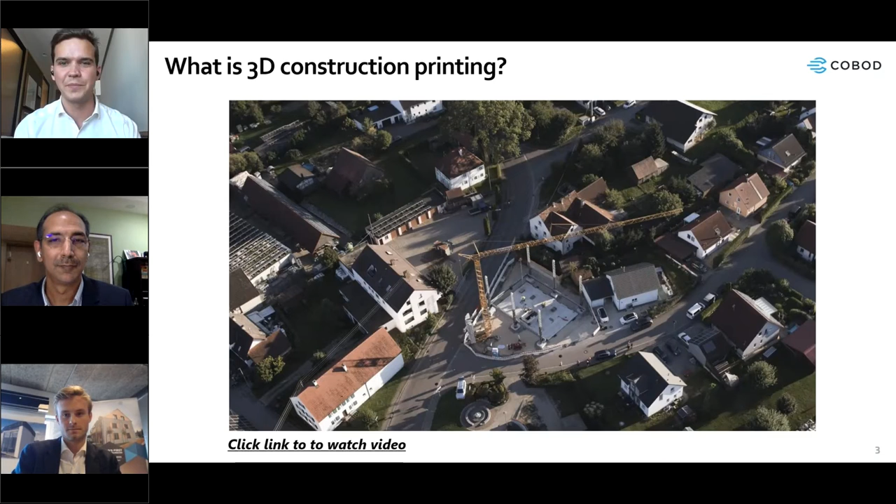Yeah, and today we will be speaking about how 3D construction printing is changing the world of construction. Before we get into it, we want to just quickly show you, because some of you might have seen it before, some might not, but let's have a look at how exactly that looks.

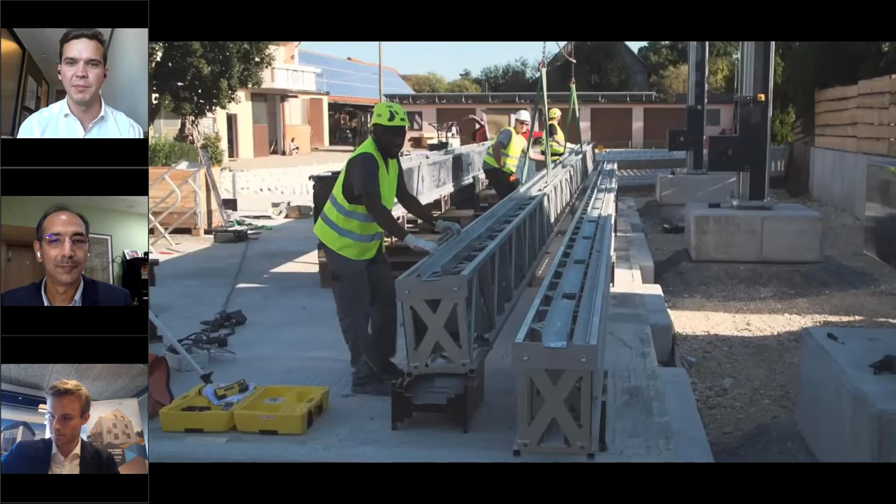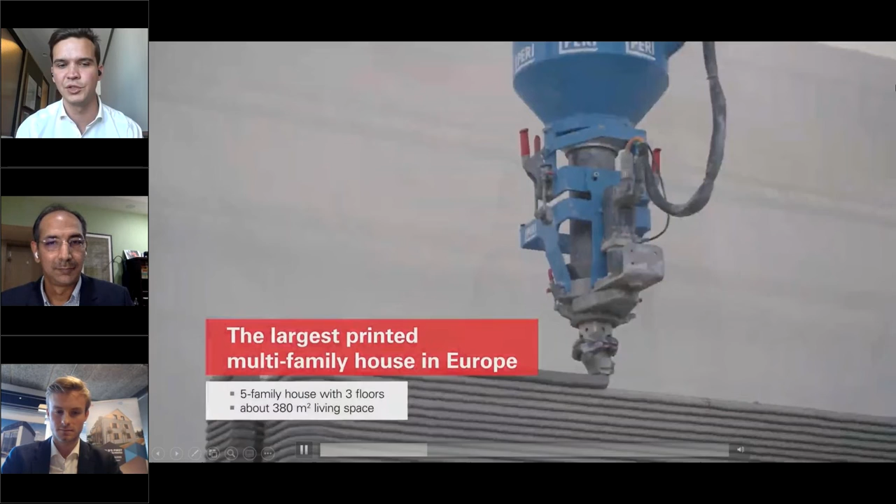So here's a video from our partner and minority investor PERI, setting up a printer here in Germany, where they're building a 3-story home, 3D printed, 380 square meters, in 3 floors. It's a really big 3D print. The video shows how the layers are put on top of each other using concrete, giving you this final structure that real people can actually live in. It's quite fascinating, and it really demonstrates that construction is ready to enter the future.

Let's quickly see what we'll talk about today. First, a quick introduction to COBOD and our 3D construction printing technology. Secondly, we would love to showcase which kind of projects have been done using this technology. And then number three, we want to discuss more theoretically the benefits of using 3D construction printing and what the future of it will be. And then lastly, of course, 15 minutes of Q&A.

Let's quickly jump into COBOD. COBOD was founded, as mentioned, in 2017. We're based out of Copenhagen, Denmark, but we're establishing 3 new offices this year: in the United States to cover North and Latin America, in Dubai to cover the Middle East and Africa, and in Malaysia to cover Asia Pacific. So really expanding across the globe. We are 80 employees right now; 12 months ago we were just 30 employees, and a year before that just 9 employees.

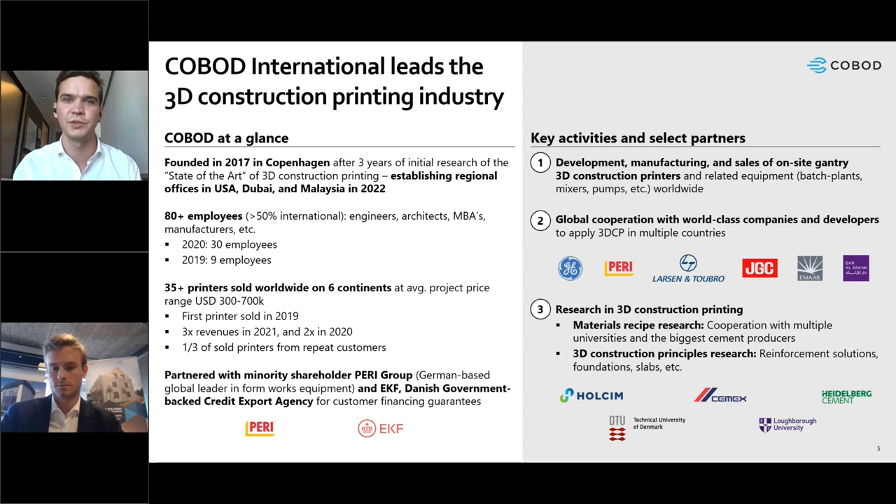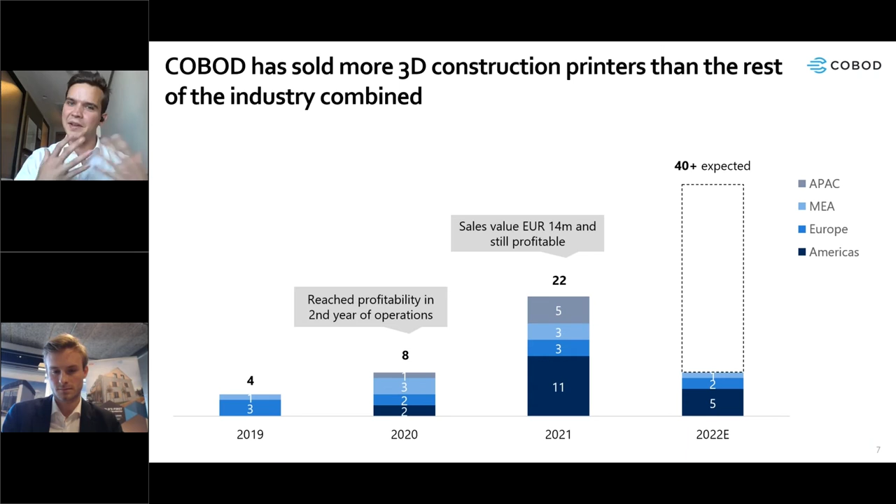If we move on, here you can see our sales. Last year we sold 22 3D construction printers, making us bigger than the rest of the industry combined. This year we expect to sell at least 40 printers. So we're really moving ahead, and this technology is ready to take on the future of construction.

If we go ahead again, Simon. Simon, why don't you take us through how the technology works? I would be delighted to, Philip. Thank you. So let me tell you a bit about how our technology functions.

We have an XYZ gantry 3D printer. It's a modular-based system. From the beginning, when we started speaking with customers, we figured out that depending on the projects customers have, the size of machine needed differs a lot. So we made a modular system from the get-go, our BOD2 construction 3D printer, which consists of 2.5 meter modules in X, Y, and Z. In X length, you can go up to 12 meters. You can go unlimited in the Y length. You can just put on extra Z poles. In height, you can go a bit above 8 meters—actually a bit above 9 as well with this installation if you put it on concrete feet.

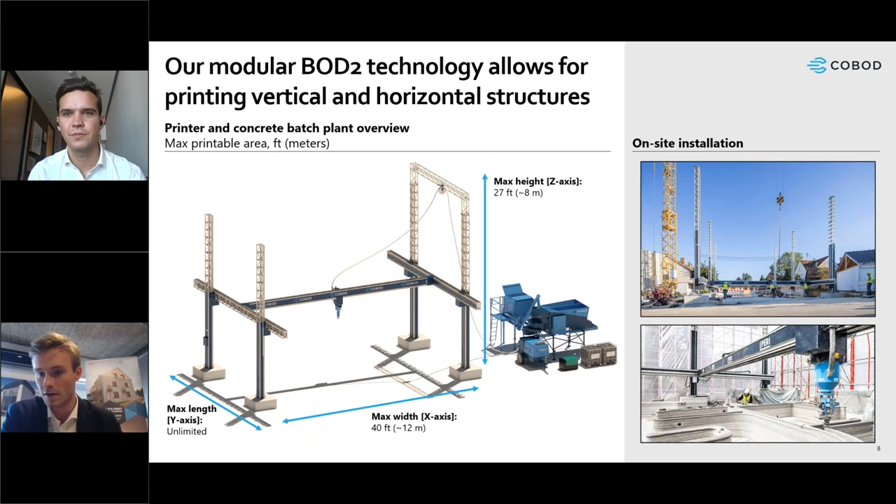On the side of the machine, you can see we have a concrete batch plant, and this allows the machine to use locally sourced material—sand, gravel, and cement. With just a little bit of additives supplied by us, we can then print directly with 99% local material. On the right-hand side, you can see an on-site installation of the technology, where it's printing at the bottom.

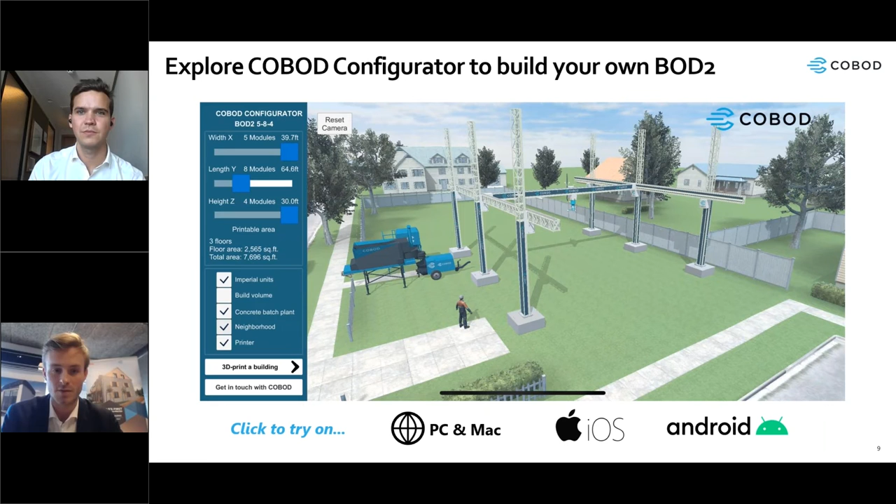I just want to quickly show you, we just developed this for World of Concrete, the biggest concrete fair in the world in Las Vegas here in January—a configurator that explains a lot about our technology and helps everybody understand where we are. So I want to switch quickly here to the configurator. I have to say this is also an Android app and iPhone app, so those of you that want to play with this afterwards, either go to your browser and go to our website, or you can play with it on your phones.

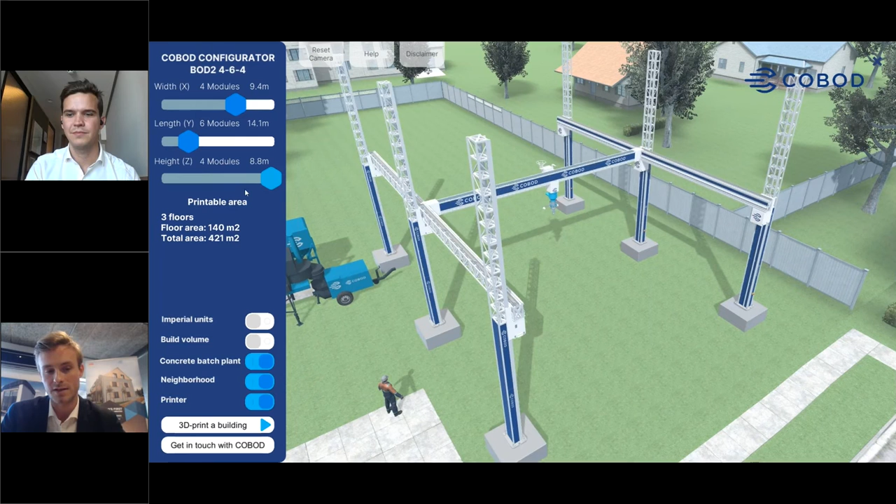The idea here is to give you an idea of how our system works. You can see we have the X, Y, and Z of the printer. You can choose how many modules you want, and you will directly see what sizes you can print. So we can put on the build volume—for example, this version, which is 464 modules, can print you 3 stories with a floor plan of 140 square meters.

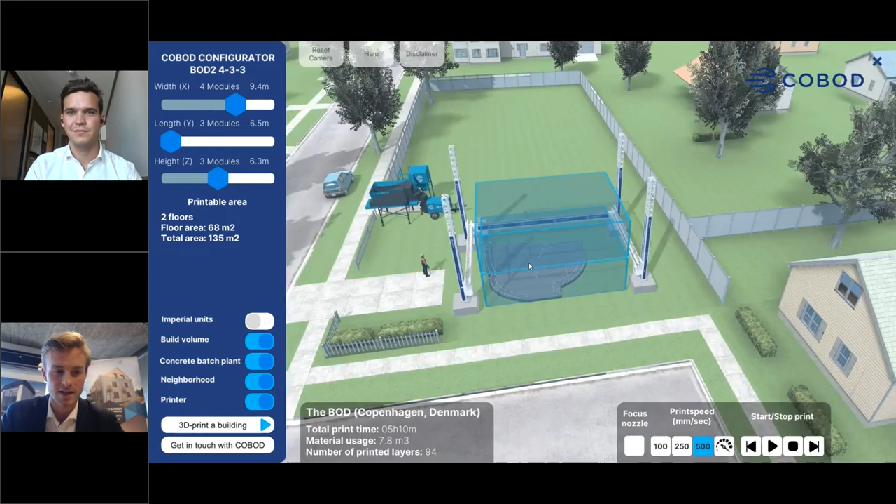We also have—so you can see how the technology functions—I'll show you the first printed house in Europe here. You can actually put in different buildings; we have a library of different ones where you can see it printing. So just speed it up to a little bit quicker here, and you can see how it all functions.

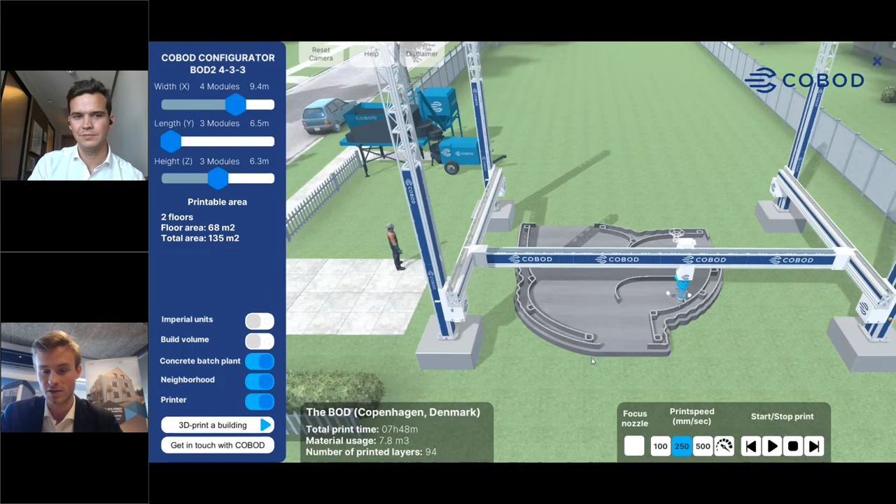At certain print speeds, you can also get an output time. This house will take approximately 8 hours to print and use approximately 8 cubic meters of concrete. So this is quite a fun tool—be sure to look at that later. And while Simon brings up the presentation, I can say it's not as choppy when you actually use it.

It's because the internet connection, when streaming to so many people, makes it a bit laggy. But back to you, Simon. I'm seeing it all fluent on my screen because it's running here locally, right? Yeah, exactly. Good to know.

Good to know. So let's jump into some of the 3D printed structures that our technology has done with different partners around the world. This gives a good picture of what the technology can really do. So to kick that off, I want to show a selection of the projects that have been done with the countless machines we have out there. These are the firsts in the world that made headlines along the 3D printing and construction media.

So we have the first building in Europe, a 2-story building in Europe, a 3-story building in Europe, a 2-story building in India. And with GE, we did the first windmill tower, which is interesting because this isn't a house - it shows this technology can be used in other areas, like what EPCs are doing. Also a residential building in Germany, buildings in Africa, and buildings in Florida. So you can see we have a wide reach of good customers using our technology to head the way for the technology. Let's jump into the first.

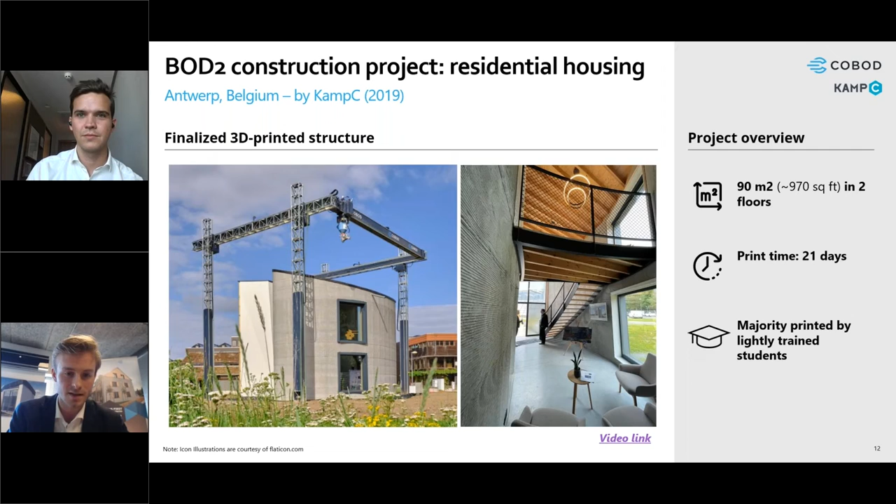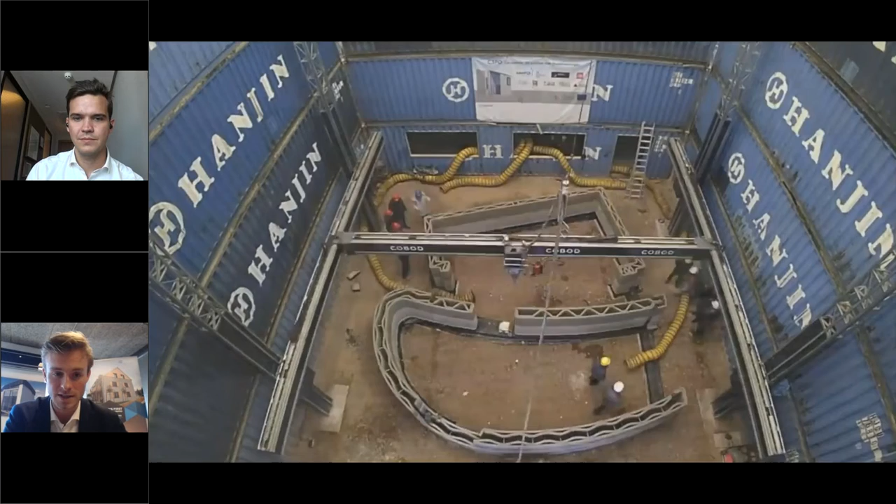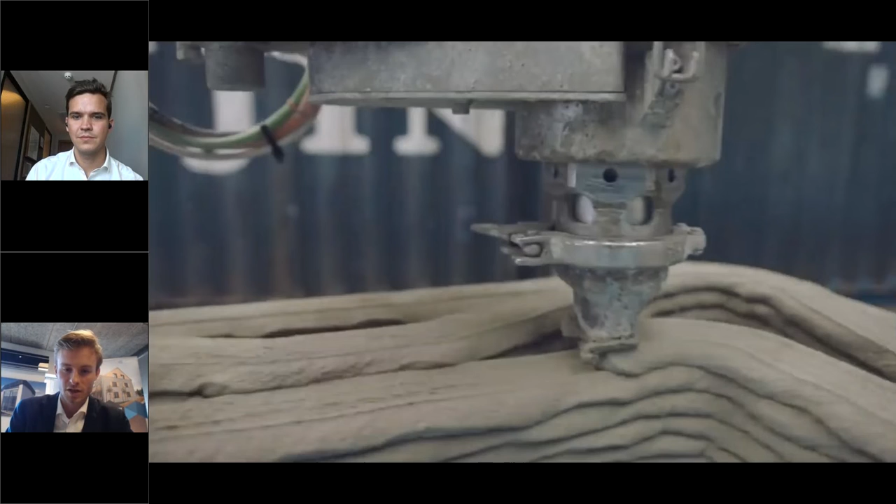It might be lagging a bit, but I think it shows an interesting point: we have the slab, and when they start printing the walls, you'll see they experimented with different kinds of infills inside the walls. Bear in mind this is still a new technology - there's lots of research still to be done, and these guys have been interested in learning how to make these structures load bearing. I'll cut the movie here - you'll have plenty of time to see more printing.

Going to Germany, close by Belgium, we have our investor PERI, a good partner for a long time now. They printed the first 2 printed houses in Germany, and these are fully permitted houses for living in, which is also a milestone in terms of regulations. This one in Beckum is 160 square meters across 2 floors. What's interesting to look at here is both the architecture, which is amazing, but also the print time.

So you can see there's 2 floors - the ground floor took 28 days for them to print, but the top floor took only 8 days. What we're seeing here is the immense learning curve new technology has - but once they master the technology, everything speeds up a lot. Here's a little video of that. You can also see they tried to build in the different amenities inside the house into the printing process.

Then we have the Wallenhausen project, a 3-story building with apartments, 380 square meters. They did this fairly close after the other project I just showed you. From the learning of the first project, you can already see they were down to 7 days per story - and these stories are a lot bigger than the other house. It's also fully permitted, which is of course really important.

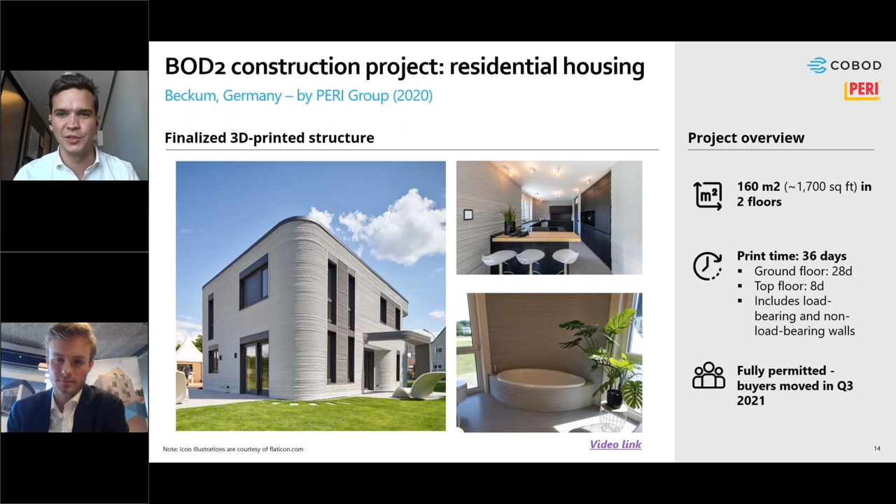May I just add, Simon? If we go back - the first project PERI did was 1,700 square feet, or 160 square meters. The second project they did went up to 4,100 square feet, so they more than doubled the size and added an additional floor. However, they decreased the print time by 15 days. So it really shows, as Simon said, just how much of a learning curve there is and how steep it is. Imagine when PERI does project number 10 or even 100 - how fast they would actually be able to do it. It's quite fascinating.

Yeah, it is fascinating indeed, Philip, and this is also showing what we want to communicate. It is a new technology, so people are learning along the way. If you look at the total in the world, we have less than 100 houses printed at this point in time. So just by learning, we can see that this technology has immense potential to speed up the process of building.

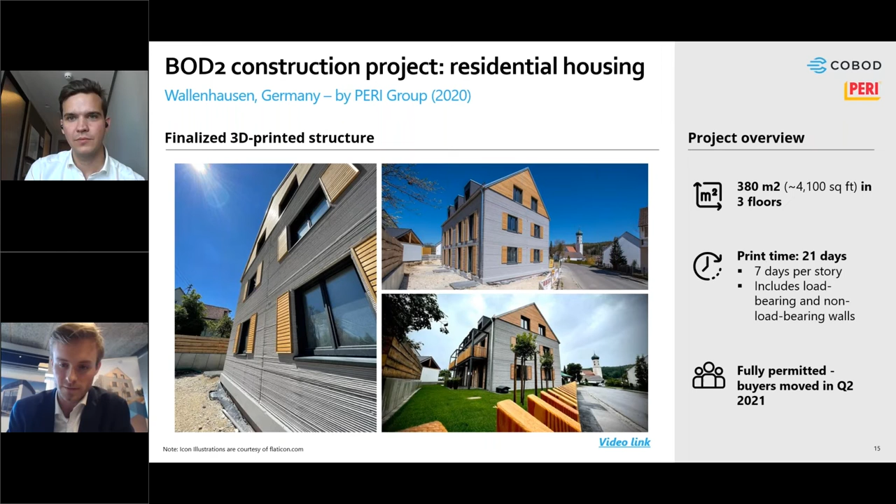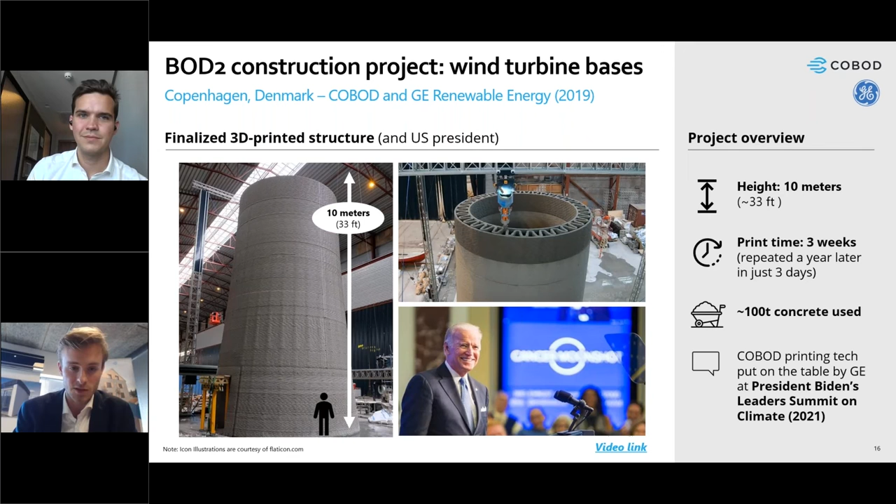So this is such a big focus area for GE that they even mentioned us and our technology and our collaboration at the President's Summit for Climate in 2021, which we're really happy for, of course.

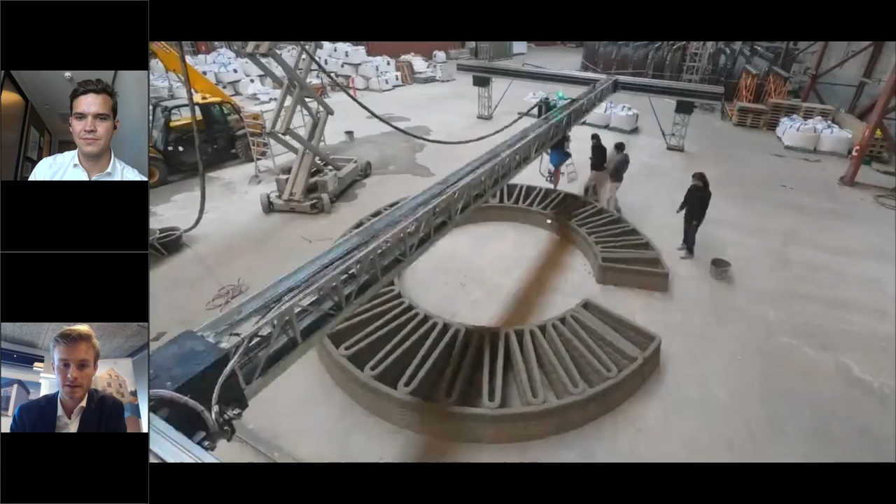And then we can just see a small video here. It's probably lagging, but you can see some time lapse of the printing of the windmill tower. So quite a big project, and also quite a big teardown when we had to get it out of this hall.

So I want to give the word to you, Philip, to tell us a bit more about this Africa project. Thanks. Yeah, I think the last project Simon showed us with GE really shows that it's not just residential or affordable housing. There's also a focus area which is more commercial, or as in this example, a school which was actually 3D printed. This is done by 14 Trees in Malawi, Africa, and it took only 18 hours to print.

And that gives the kids here an indoor classroom and an outdoor classroom. I think we even have a small video here covered by World Economic Forum. So you can see here the kids playing around it. It was actually very cool.

All the kids gathered around the printer as it was being set up and sort of followed through the full print length. So imagine putting a printer on a flatbed truck and then taking it around in local areas and printing schools or other structures that are needed by the local community.

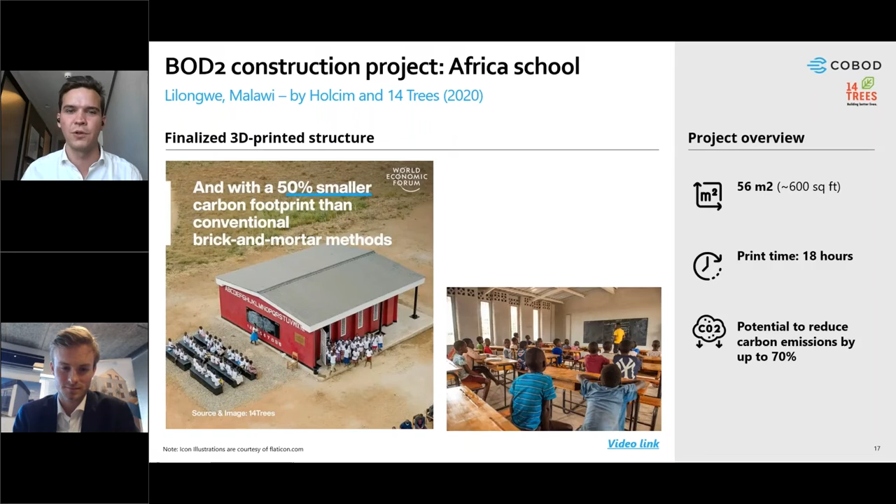So this also shows that the technology is sort of maturing. It's no longer smaller one-off projects, but the projects are actually becoming larger, both in terms of volume, the number of units, but also the units themselves.

So we can move on. Those were an overview of some of the projects that our partners have done. There's a lot more that they have done, we can't cover them all today, but we're happy to discuss further in our Q&A, of course.

Lastly, we want to talk about the benefits and the future of 3D construction printing. So why do we do all these projects? Why have our partners decided to actually invest in this technology? Well, we see four main reasons for that.

Number one is automation - you reduce the labor cost. The second one is speed - you can do structures faster by 3D printing. Number three is sustainability - you only print what's needed, you reduce the waste. And number four is design freedom - it opens up so many new doors that wouldn't have been possible before from a cost perspective.

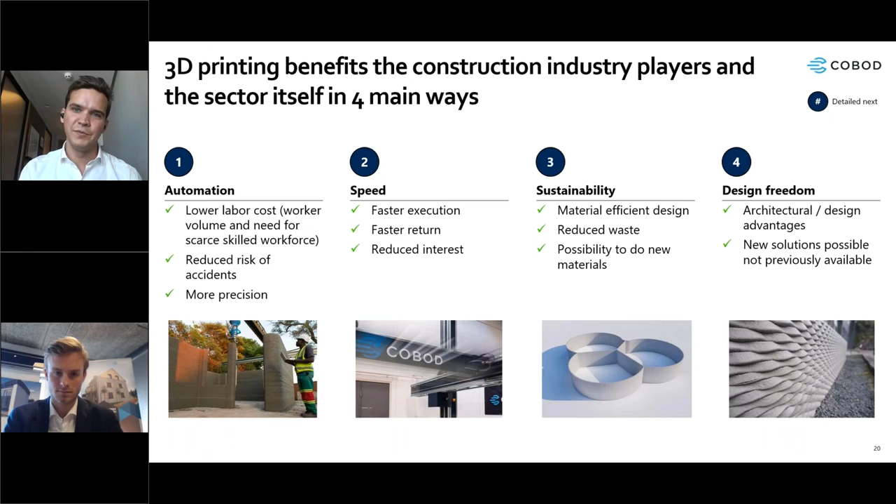So let's jump into each one of these first. If we start with automation, why is automation needed in the construction industry?

McKinsey & Company did a report stating that almost 50% of activities in the construction industry can be automated. It's one of the least digitized and automated industries in the world.

Secondly, there is a major lack of skilled labor all across the globe, meaning that project prices increase and it takes longer, they get postponed. Thirdly, the rising cost of materials—steel and lumber have increased immensely in value all across the globe.

This is why cost and automation is an important factor. And then lastly, there is a global shortage of affordable housing. In the States alone, the estimate is around 4 million homes. Worldwide, the number is really staggering. This is where automation and cost reduction can help.

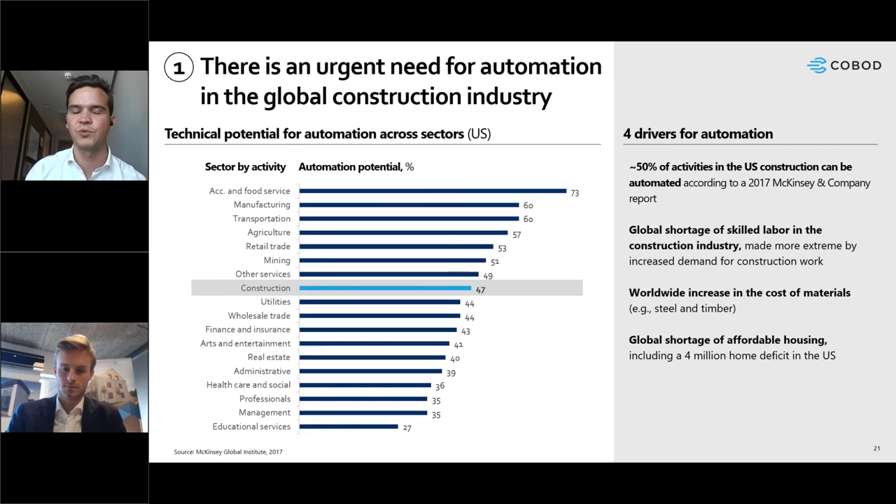So speaking of cost reduction, how does it actually look like from a practical level? Well, the cost addressed by 3D construction printing differs depending on the type of structure. If you're doing residential housing, around 30 to 45% of the cost is being addressed by 3D construction printing. I'll show you an example of just that in 5 seconds.

But if we go down the list, if you do a school, you're addressing more of that cost share. For instance, a school doesn't have a kitchen. So for a school like the one we showed you before, you'd be printing the walls, but you won't have that kitchen, which is also a cost factor.

So the addressable share really increases all the way down to, say, a wind turbine tower base that Simon showed you, where that's 100% concrete if we don't take into account the steel reinforcement. So the overall message is that it really differs from construction project to construction project.

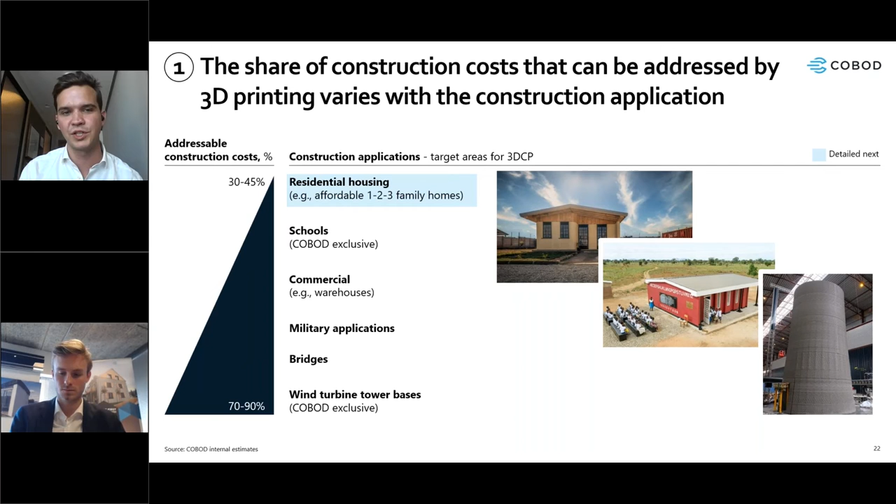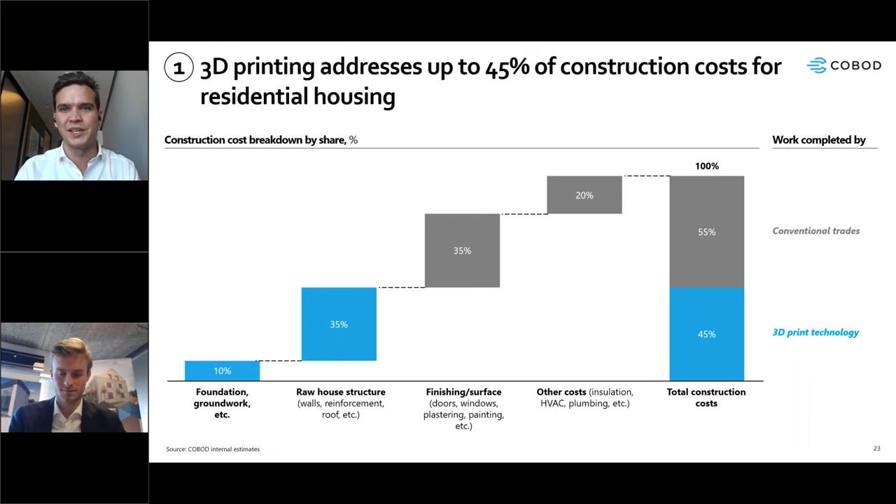And then lastly, other costs that cannot be addressed by 3D construction printing, for instance insulation, heating, ventilation, plumbing—all of that still has to be done with conventional methods. That's why we say up to 45% of the costs can be addressed. That's not to say that you save 45%, but that the total cost addresses 45%.

So how can we actually reduce costs with 3D construction printing of those 45%? If we look at structures that are flat versus curved, you can really see how that comes into play. If we look at a completely flat wall, the cost of constructing it with 3D construction printing versus conventional, we call that 1x—that could be, for instance, 1,000 euros.

However, if we do just one curve, the cost of conventional construction actually doubles. The cost of 3D construction printing remains more or less the same, because the machine doesn't care—for the machine, it's just a file that it spits out. And if you do two curves to that wall, it's around 10 times more expensive with conventional. But with 3D construction printing, the cost doesn't really move, because again, the machine doesn't care.

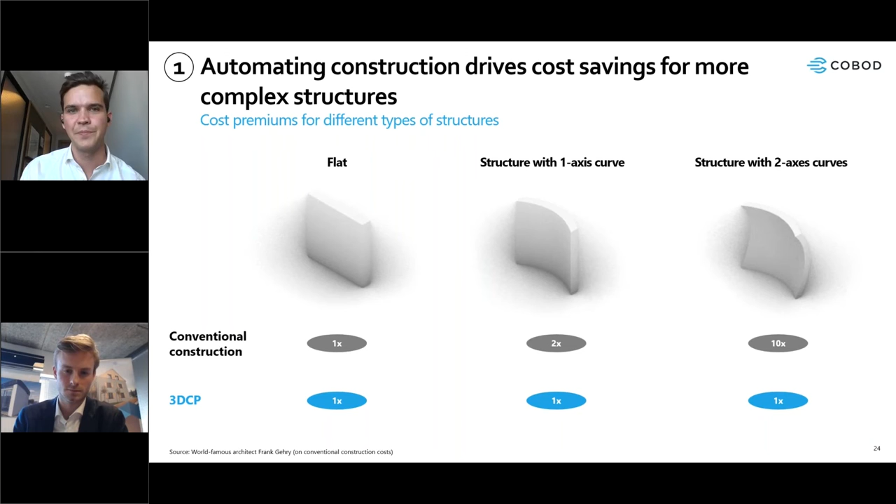So the cost for the walls, potentially also the foundation and the slabs, is very, very low compared to if it had been done with more traditional methods such as timber or brick. In the end, this will be a very big factor in why these companies choose to go for 3D construction printing.

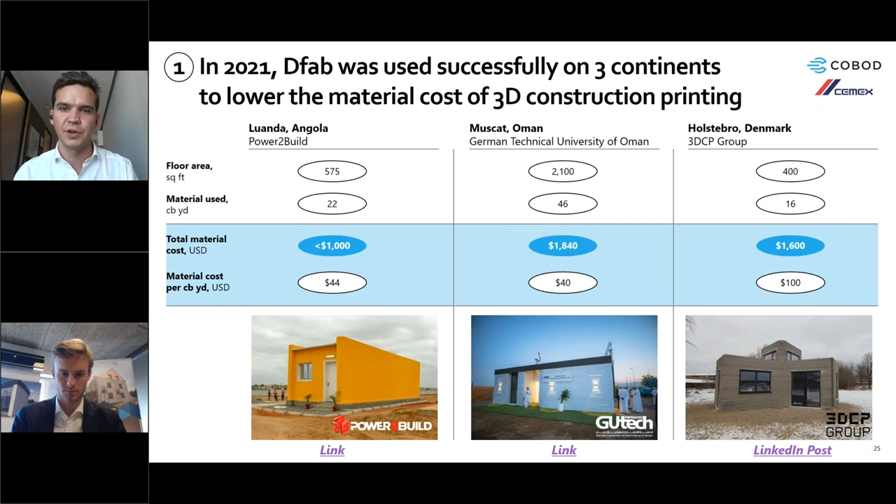I think I'll take over from here. Thank you, Philip. So let's look into the second one, where we look at the speed increase that we can achieve with this technology as well.

We want to show you this example. On the left side, you see the first printed house in Europe that we made in 2017. We made that house in 2 months, with a lot of learnings. You can see the machine, that was our very first installation of one of our technologies. It took us 2 months and used 20 tons of concrete.

After we built our second generation machine, we figured, why not do this again? So in 2019, just 2 years after we made the first house, with all the learnings we made and our new technology on hand, we tested the print again. What we saw was that we did it in 3 days, so 28 hours of printing time in total, spanning over 3 days. So we did some sleeping there as well.

But if you look at these gains, it's quite interesting, right? It's more than 20x in terms of time. This is what we want to show as well, that it has a huge potential in terms of really speeding up the process of making walls faster.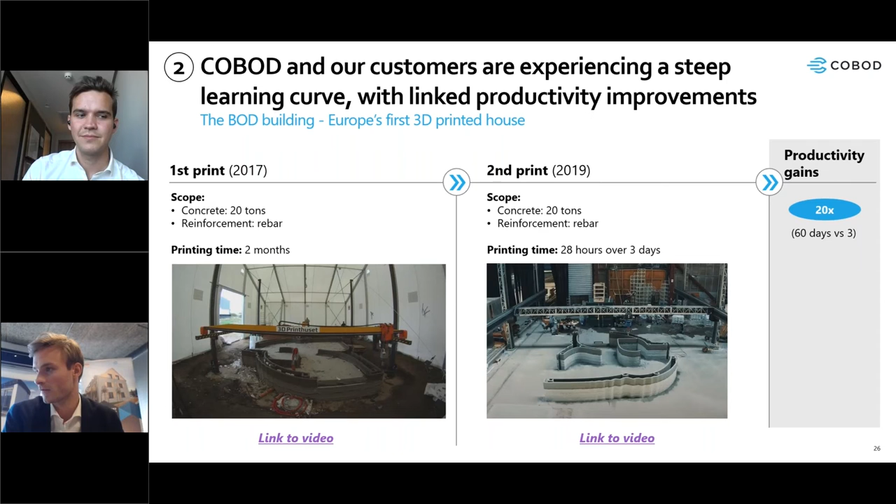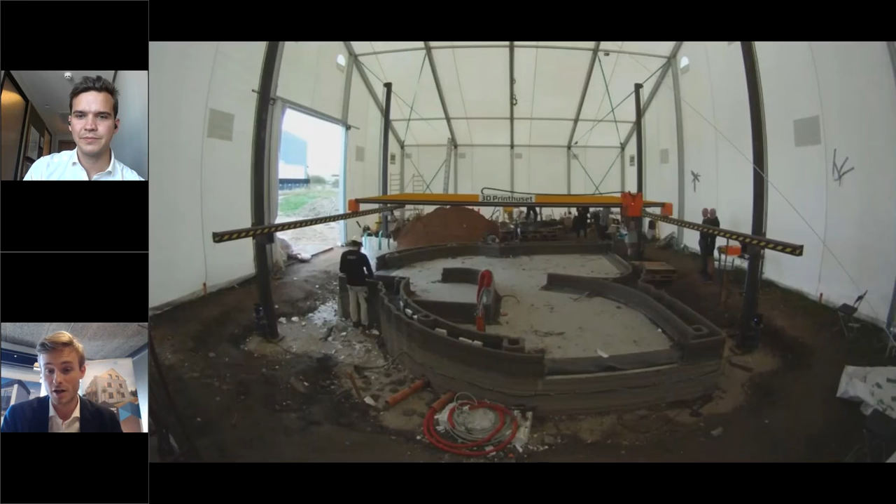I think we actually have some videos, but I tried to mitigate these a bit because of the lagging. You can also see the quality here of our first house was not up to par with what we can do today, at least. We did a lot of research back then, let's put it that way. We learned so much from this, which basically made what we are today. So it was a very, very groundbreaking project at that point in time.

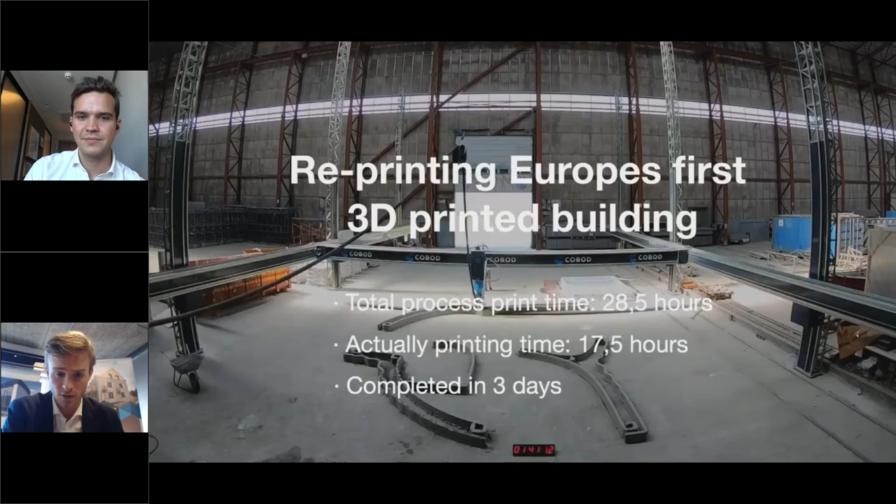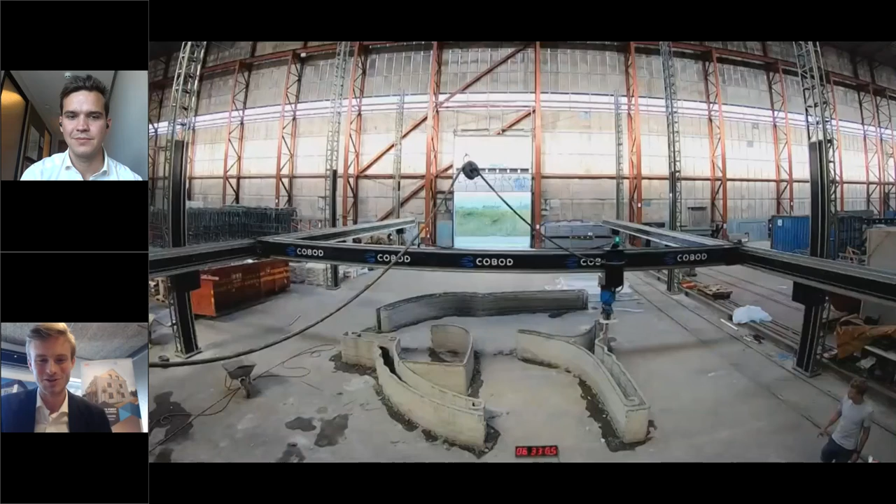I'll just jump over here so you can see the second slideshow. I think that's a bit more interesting. This shows the second print we made with our second generation BOD2 printer. This is the same technology we are selling today. You can see the counter in the front of the video showing the time of the time lapse. More than that, the quality of the walls just looks so much better than what they did just 2 years before that. Because of time, I will just cut this video again. If you want to see all this, we have a good YouTube page as well with all these videos populated.

So if we look at step number 3, which was the sustainability aspect of improvements that 3D construction printing can do, we're mainly looking at 4 different areas. One is that you can actually make less waste. This is quite interesting because basically when you're not casting, with 3D printing technology you can already accommodate for holes for windows, for electrical and plumbing. So all that material is saved because you don't have to extrude it. We're only using the material that we need for the exact build and walls.

Less reinforcement, because in prefab concrete, you typically put way too much reinforcement inside to make it possible to lift it and move it to site. We don't need to do that. We are printing directly on site with our technology, which mitigates the excess reinforcement.

Then material efficient design. Philip told you about the form freedom that we have with our technology, which really taps into this, right? Before, you only did square houses because that was the only cost-efficient thing to do. Now we can actually look at using the forms to mitigate material usage as well. And then new materials, of course, a super interesting point. We used, for example, 23% recycled roof tiles in the BOD building that you saw just before. It could be other filling materials and so on as well. There's even a lot of looking at more green cements, which I think the host of this webinar also knows a lot about.

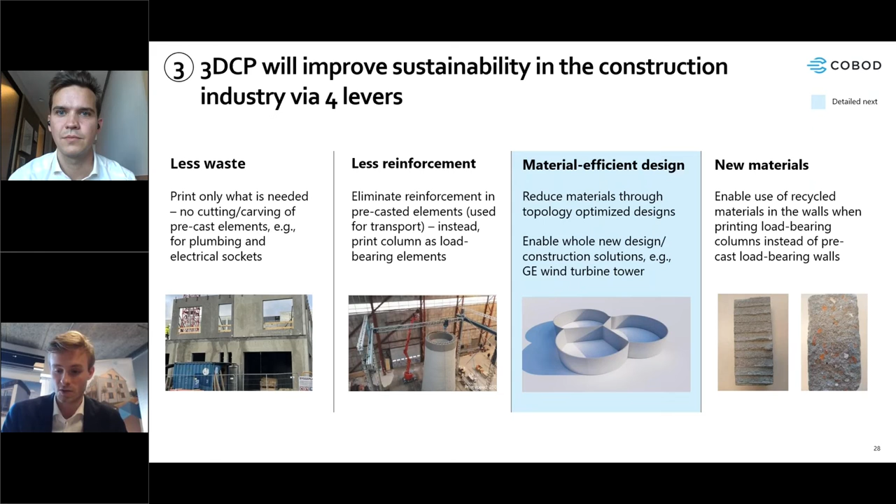So if we look at just the topology optimization, so in reducing material for a certain size of building, we had this case which actually taps into 2 schools in Africa, as we talked about earlier, where the material cost is really one of the driving factors for the cost of the full building. So the idea was to get the same square meterage out of less material. And by doing round forms, you all know that you're actually gaining more area per surface area of walls.

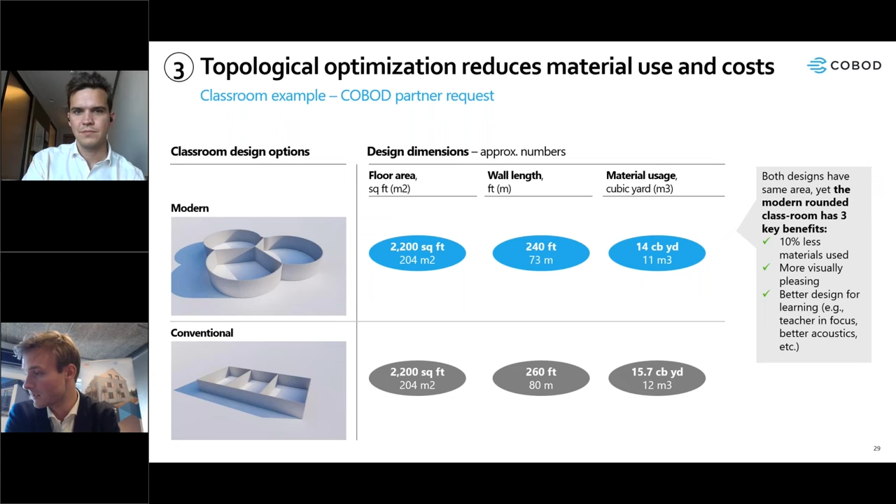So with 204 square meters of floor space in this new design, we're using 11 cubic meters of concrete. In a conventional design with classrooms of the same sizes, but in a square design, you use 12. So that's around 10% of material saved. And in some markets, 10% material saved means much more than 10% in price reduction, right? Super interesting point as well. Then over to you, Phil.

So just to recap what we've said so far, there are 4 benefits to 3D construction printing. We went through automation, we went through speed, and now Simon just took you through the sustainability aspect. Now, the last aspect is one that all the architects listening in today will find interesting, which is that the technology opens up so many doors for doing things in new ways. That's why at COBOD, we say you should not use technology of the future to replicate solutions of the past. We'll give you a few examples, not even related to 3D construction printing. The first one is a bridge.

It was built almost 250 years ago in England, called the Iron Bridge. It's 100 feet in span, around 30 meters. This was the first major bridge made out of cast iron, a very new material for this application back then. However, the way this new technology was used, they basically replicated solutions of the past. How? They used dovetail joints, which you can see to the right. Those joints were known from the timber industry, where you'd take wood joints and create them like that. They took the new material but replicated past solutions, which led to an increase in cost, added more complexity, and made the bridge not as strong as it could have been.

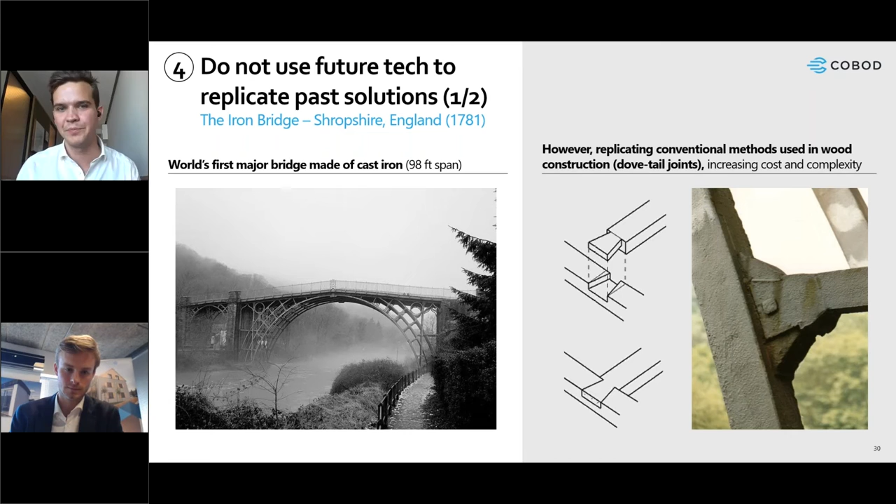So if we fast forward 100 years to the Eiffel Tower, here they also used a fantastic element, steel, but now they had learned how to use the future technology to create new things, building the Eiffel Tower, which is 11 times larger than the span of the bridge. The Eiffel Tower was actually the largest structure in the world for 41 years. You can see that was accomplished by taking the steel and putting it together in new ways. In essence, they were not replicating past solutions.

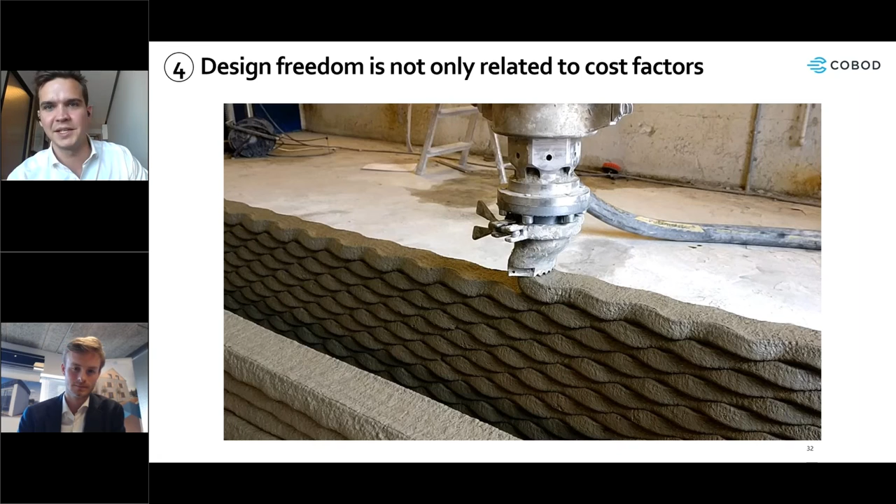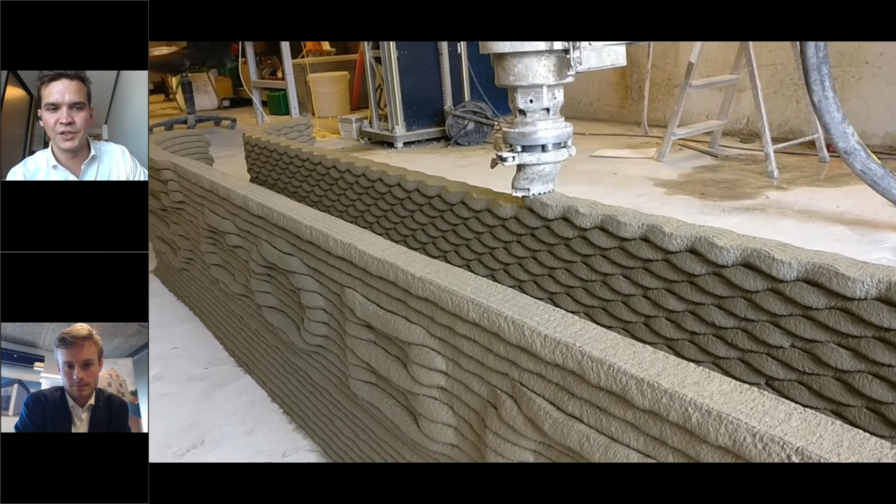Another example would be creating things that conventionally would be way too expensive to do. One example is printing wavy patterns as part of the wall. Simon, if you play the video now, again it's a bit laggy here, but you can see how the printer creates this beautiful design simply from a 3D file. There in the front, you can even see we 3D printed our logo as part of that print. The cost of this is the same. If the wall had been flat, it would have been the same cost because the printer doesn't really care.

So the conclusion here is really to say, how can we take this fantastic new technology and think outside of the box? Those are the 4 key benefits of 3D construction printing as we see it.

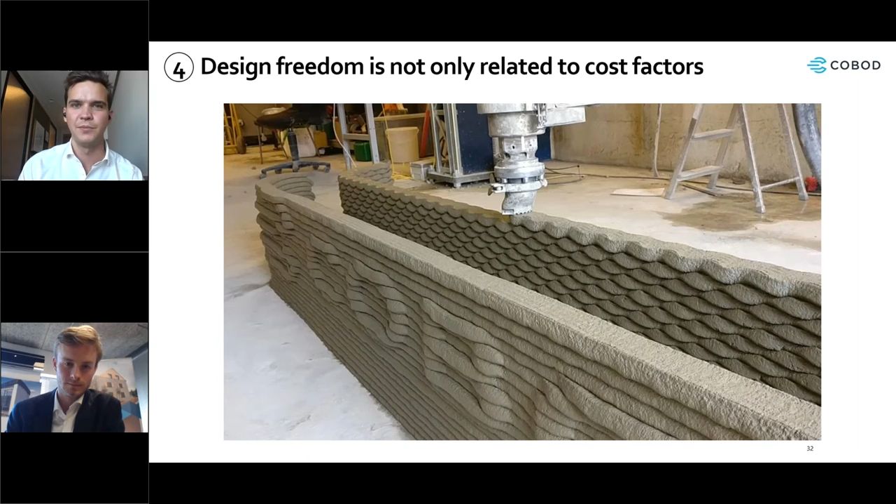Moving on, those benefits are great. What does it mean for the future of the technology and the future of construction? We might be biased, but we really see that 3D construction printing will take the construction industry from one S curve to the next. Construction is, as mentioned earlier, one of the least digitized and automated industries in the world. However, with all these benefits it brings, you're really pushing construction to the next level. We see three key drivers of this, of how to increase adoption.

Number one is there will be a lot of improvements in the technology alone. As you see with mobile phones or any other technology, every year there are improvements. So 3D construction printers will increase in speed, reliability will increase, material mixing will be more consistent, etc. And then, of course, new features will be added to the printers, which is something we will announce a lot of great things about in the coming years. I cannot speak too much to it right now, but those will be happening, taking construction printers from being just 3D printing to multifunctional construction robots.

The second driver of adoption is scale. Simon showed you before that the structure done with GE Renewable Energy, the wind turbine tower base, was 10 meters tall. Well, we're implementing, and we've developed and recently delivered a printer to GE which is able to print up to 20 to 25 meters in height. It's staggering, 6 to 7 stories in height done by this machine here. It's a really, really big piece of equipment, and we're going to see more and more of these big machines being deployed all around the globe.

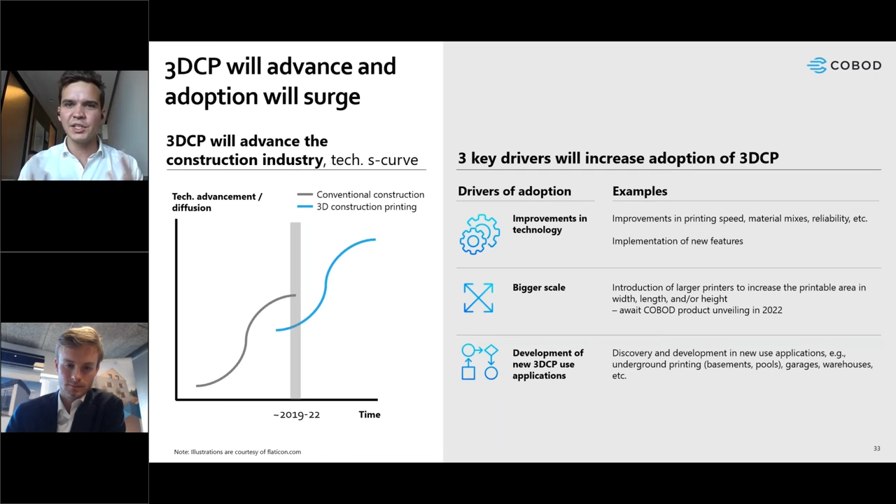The third driver of 3D construction printing for increased adoption is really the development of new use cases. What if the printer could be used underground? Can you print a basement or a pool? What about commercial applications such as garages, warehouses, logistics centers, hotels? There are so many areas yet to be explored besides just residential affordable housing. So we see the future being very, very bright for 3D construction printing.

In essence, this is how we see it. When the PC was introduced, when the laptop was introduced in the 1980s, along with the mobile phone, they really couldn't do that much, and only a few people actually owned them. However, fast forward a few decades, all these products are ubiquitous. There are so many new features that were introduced. They're super fast, super reliable, and you couldn't imagine your life without them.

That's not to say that every person in the world will own a 3D construction printer, but we know this technology will go in that direction, where it will become something you'll see across the globe being used in construction like any other piece of equipment in that industry.

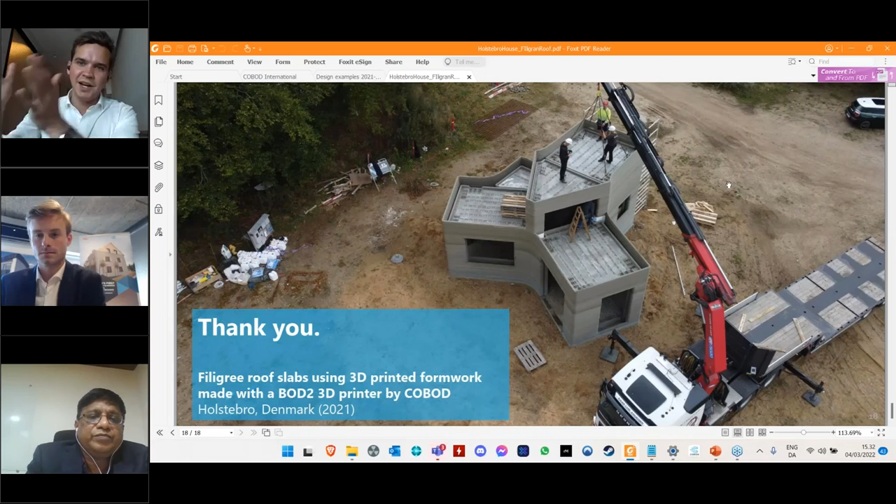Once that's cured, you would put in concrete and rebar and pour that. Then you would lift it to the side using a crane. While the slabs are curing to the side, you would print the walls where the printer is standing. Once the walls are there, you would move the roof slabs back on top.

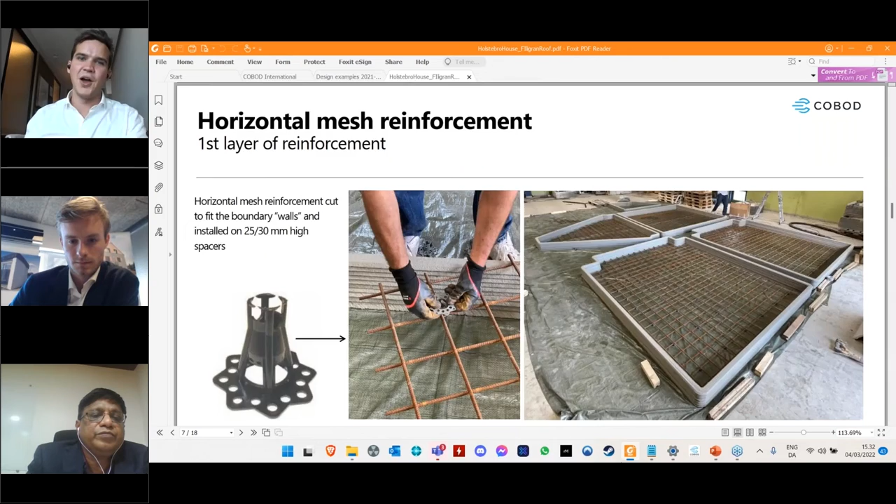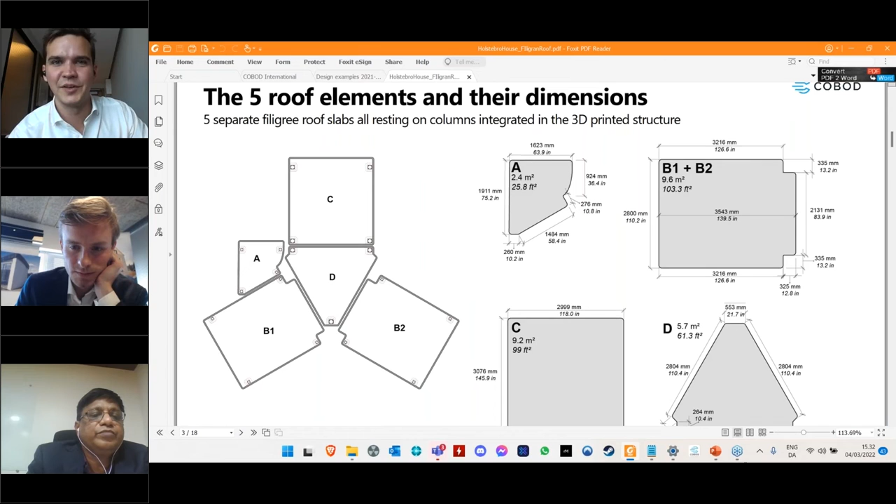You can actually see in this presentation the five steps — Simon, if you go back just one, to the five steps page. We're not sitting in the same room; I'm actually visiting some of our clients in Ireland. Simon, there's a page with five steps.

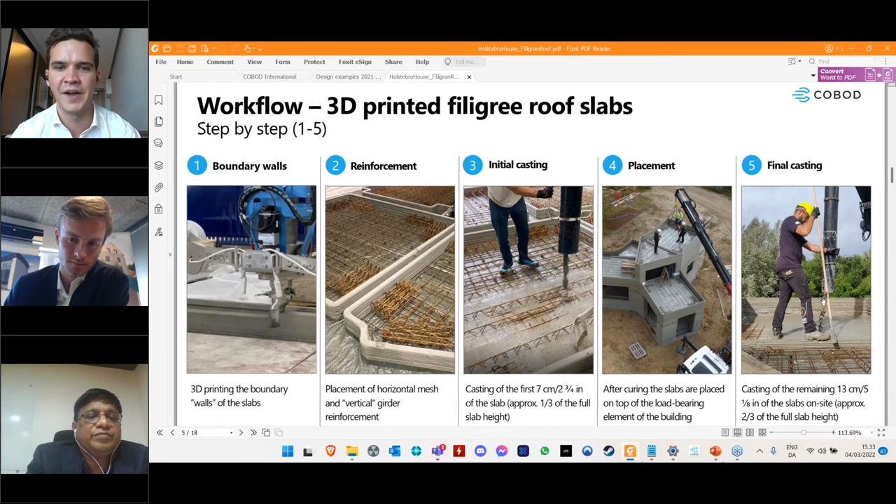Then you cast the concrete down around the first 7 centimeters, which means there's a bit of that steel still sticking out from the concrete. Once that has cured, you can place it on top of the building, on top of the 3D printed walls, and finally, as step 5, you do the final casting. These guys have really done a tremendous job — our clients from Copenhagen, 3DCP Group is the name.

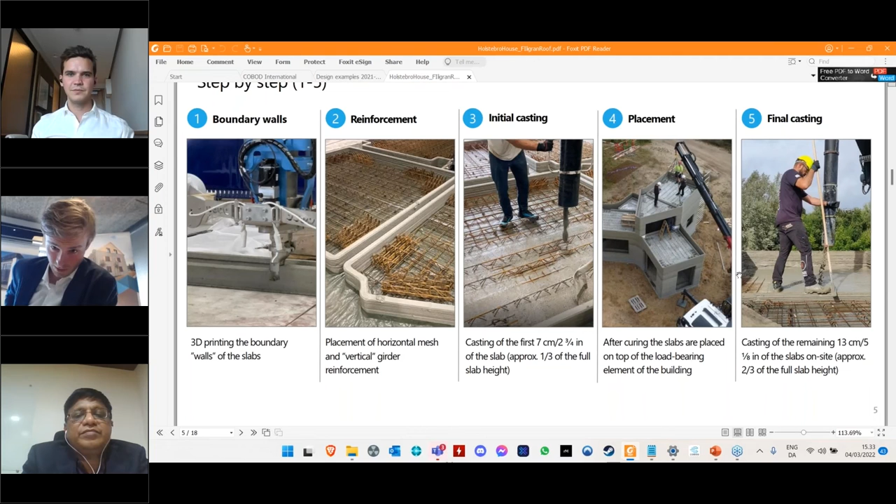The beauty about this is that you actually print the slabs before you start printing the house on site. You pull them to the side and let them cure; meanwhile, you're printing the walls, and they'll be ready when you need to apply them.

Philip, maybe it's a silly question, but building on some comments and questions — is there potential to combine 3D printing plus precasting? I think that sorts a lot of construction issues, gives you design flexibility, offers speed, and as I saw in your presentation, the learning curve can accelerate printing times. Is that a possibility — is that an experiment you've done, or something in progress?

So just to clarify, are you meaning using our technology as prefab? Yeah — the thought was that there are pieces you're very good at, but there's time involved in setup on location, which is the tricky bit from a 3D printing perspective. But the speed, the form, the shape — those are strengths. If you combine both phases, it might be a win-win and sort out a lot of the negatives of both technologies.

Sure, and that's definitely possible — there might be use cases or different projects where it makes sense to 3D print some of it, with some elements done off-site as prefab. That could definitely be the case. What we've seen now with our customers is that they really want to go out and test the technology, be on site, and utilize all the benefits. But I'm sure in the future there could definitely be cases where the two are combined.